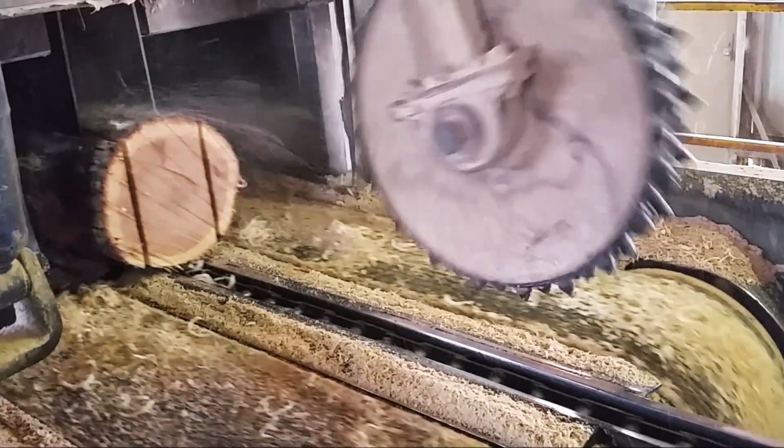Only about 10% of bearings reach their calculated lifespan. Grease is used in 90% of bearing applications. Most premature failures are caused by lubrication problems. This is an obvious concern. These statistics show that greased bearings rarely reach their designed life. If the number one cause of premature bearing failures could be eliminated, and in doing so, save time and money, what would this do for you?

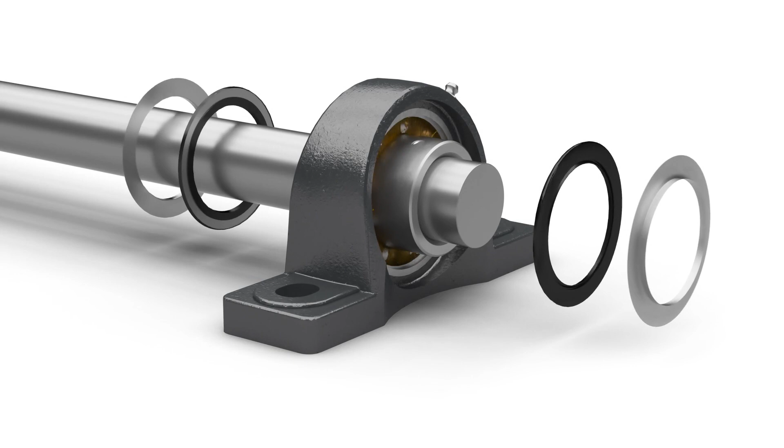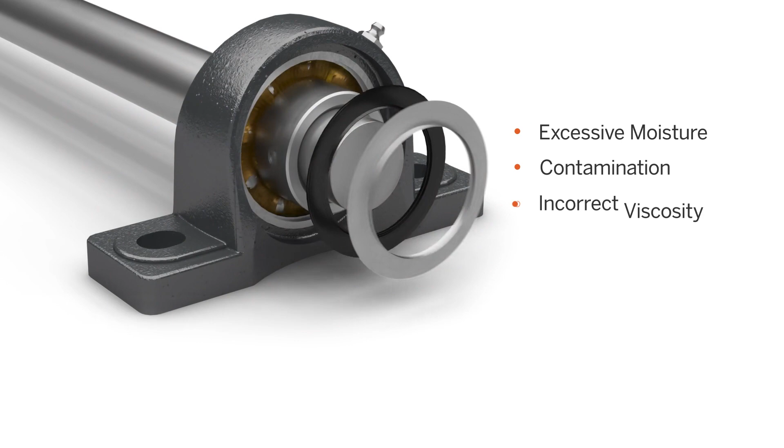Bearing lubrication is easy to get wrong. It's impossible to know how much grease is in a bearing at any given moment, due to shields or seals obstructing the view. The condition of the grease is dependent on several variables. Situations involving excessive moisture, contamination, incorrect viscosity, incompatibility, or running a bearing that has been over or under greased lead to 80% of premature bearing failures. How much time and money could be saved using a bearing that eliminates these concerns?

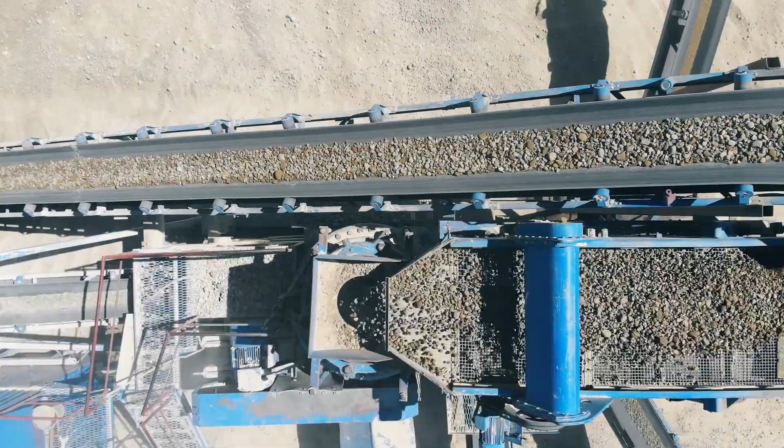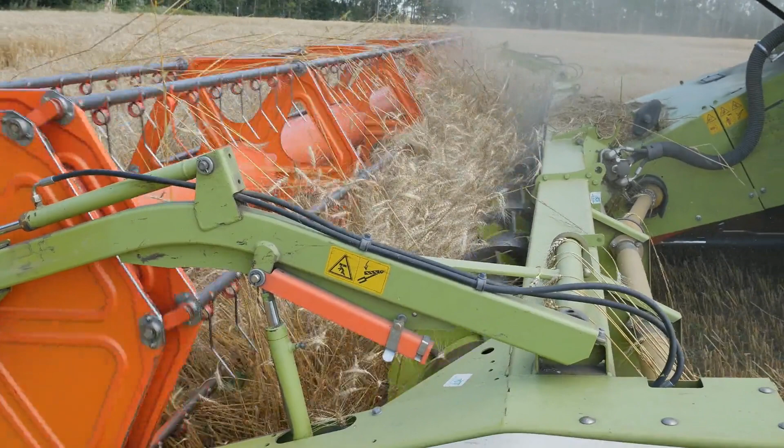Hard-to-access locations can create additional maintenance problems. Needing lift equipment or having to disassemble machinery to service a bearing creates downtime that affects the bottom line. Additionally, bearings in dangerous-to-reach locations are safety hazards for maintenance personnel. Regardless of a bearing's location, proper maintenance is necessary to avoid failure.

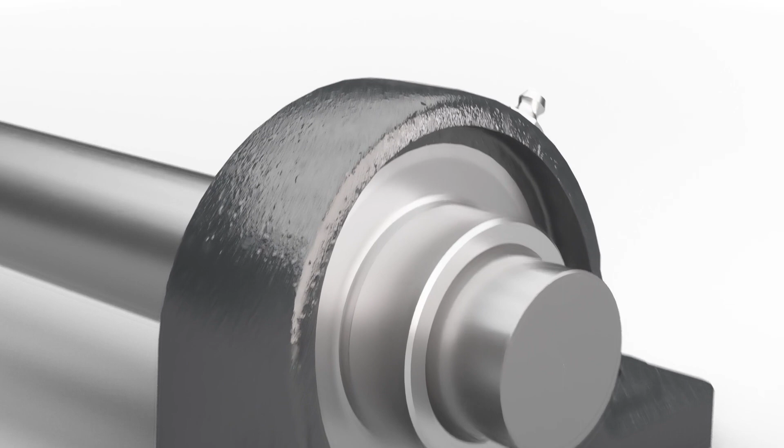Optimal bearing function is reliant on the user to get the lubrication process right. Even the most experienced maintenance technicians sometimes have only their best educated guess. How much grease does this bearing need right now? Will this bearing have enough grease by the time we relubricate? Has the grease within this bearing been compromised? What if all of these problems could be addressed by a single solution?

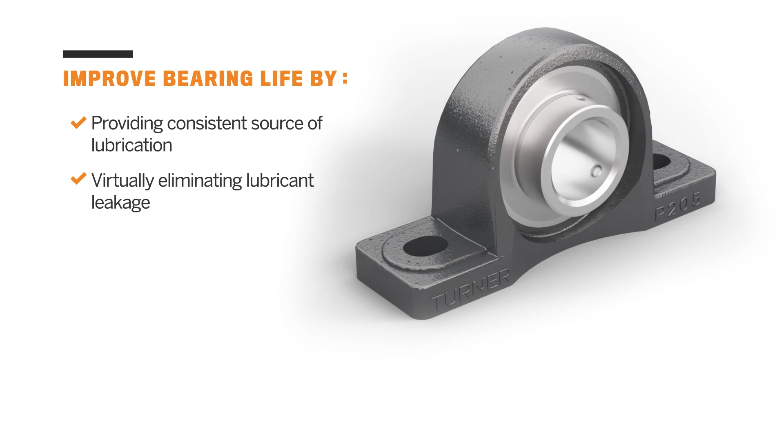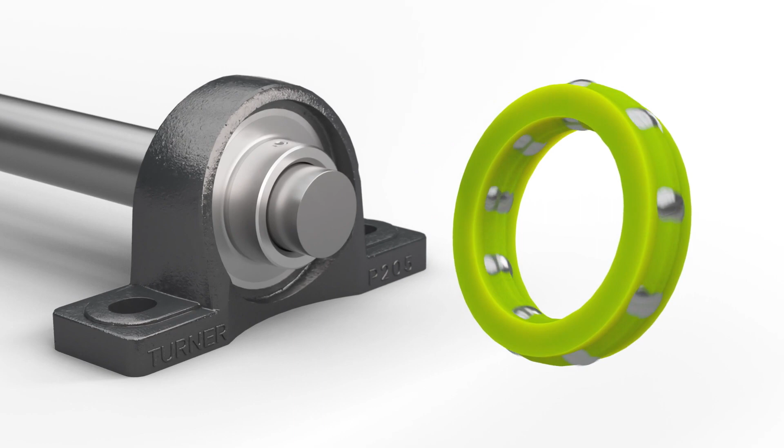A solution that improves bearing life by providing a consistent and reliable source of lubrication, virtually eliminating lubricant leakage, protection against contamination, and never requiring additional lubrication. The solution is permanent lubrication. Permanent lubrication is an oil-saturated polymer material. When it's molded into the interior of the bearing, it fills all internal space without impeding the rolling elements.

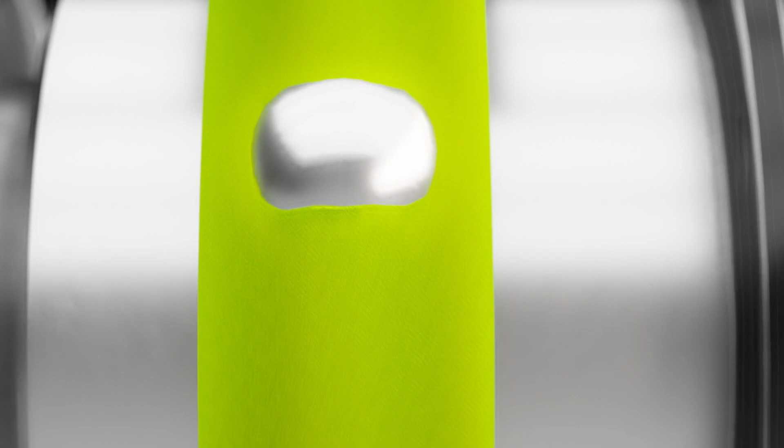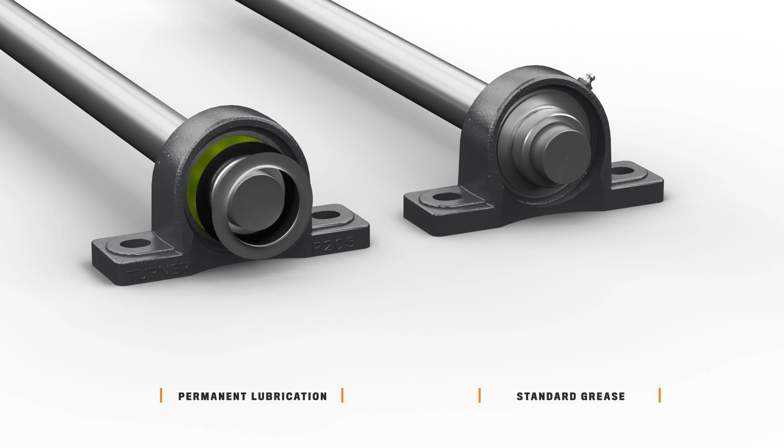Micropores, as small as 1/10,000th of an inch within the polymer, release oil during operation and reabsorb it when the bearing is not in use. Permanent lubrication can hold up to 4 times the base oil as most greased bearings, which allows for longer lubricant life and a maintenance-free bearing. This effectively takes the guesswork out of lubrication, and with oil retention being very high, resulting in almost no loss over the course of bearing life, the interactions with these bearings are limited to installation and replacement.

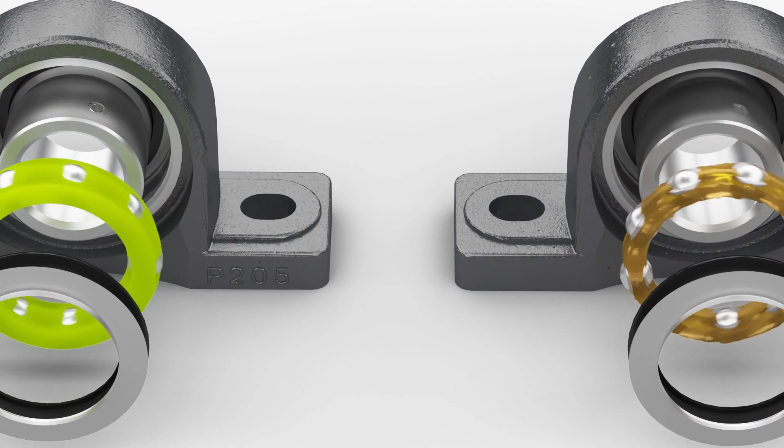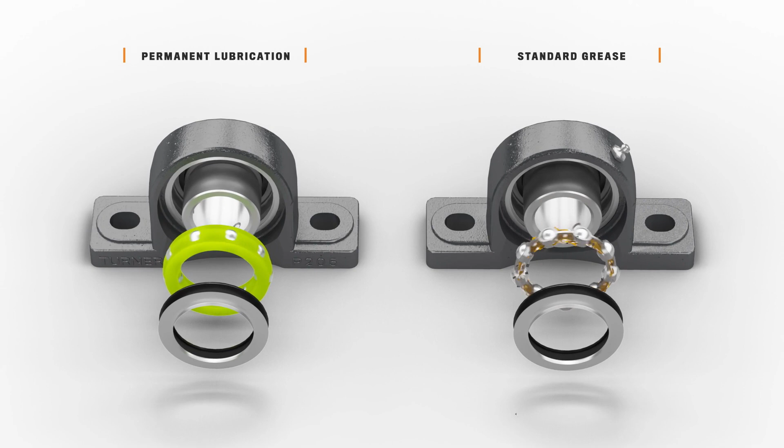The polymer, which completely fills the interior of the bearing, also acts as the seal. In a standard greased bearing, anything introduced into the interior of the bearing will be circulated with the grease, not ideal for the rolling elements, which can be damaged as they roll over contaminants repeatedly. The polymer significantly reduces the potential for foreign particulates becoming a cause of failure. The polymer also maintains its form during intense washdowns, protecting against the ingress of water or cleaners and washout of the oil.

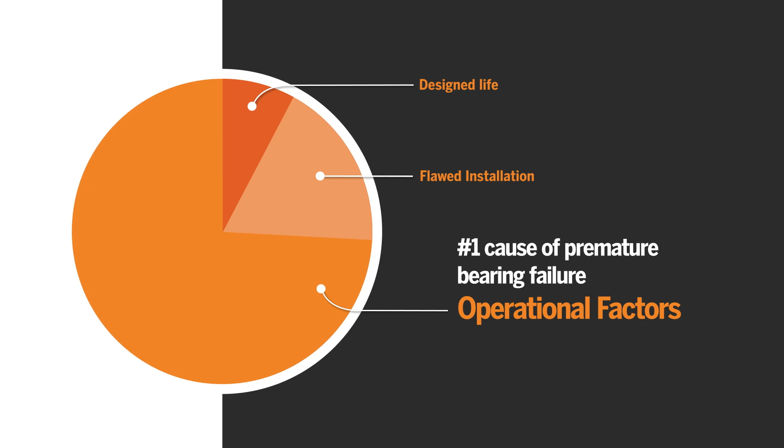Permanent lubrication allows original equipment manufacturers to add consistency to their product through the removal of the human element. By maintaining consistent lubrication, bearings last longer, resulting in less failure, increased customer satisfaction, and reduced warranty claims.

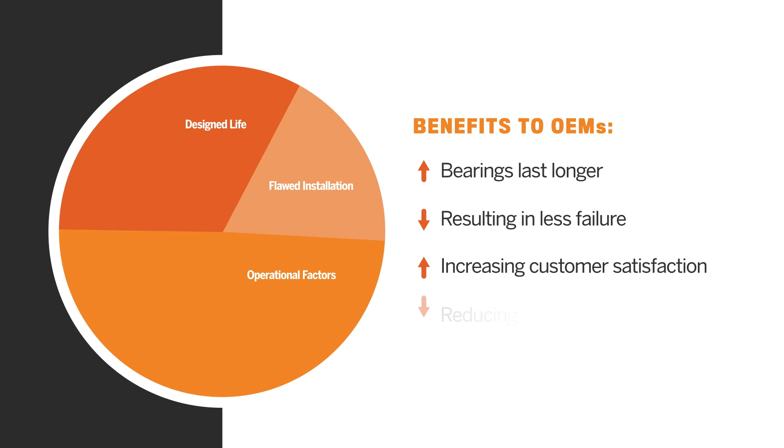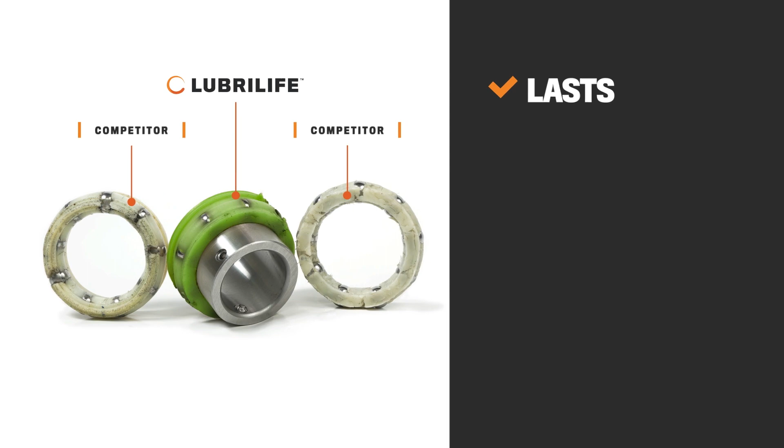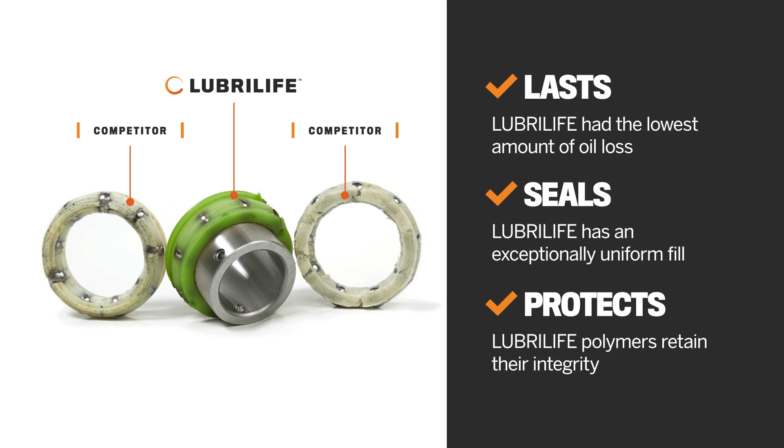Introducing Lubrilife, the new permanent lubrication solution from BART. Lubrilife is a game changer for the bearing industry. Lubrilife was tested against other permanent lubricants offered by 2 of our competitors. Here's what we found. Lubrilife had the lowest amount of oil loss, indicating excellent longevity. Lubrilife has an exceptionally uniform fill. Lubrilife polymers retain their integrity, which helps resist seal deformation in even the most punishing applications, performing the best in eliminating contamination issues. We're pleased to offer this product to our loyal BART customers.

Lubrilife is available in many of our Axis, Mariner, and Turner bearings, with either standard or food-grade options.